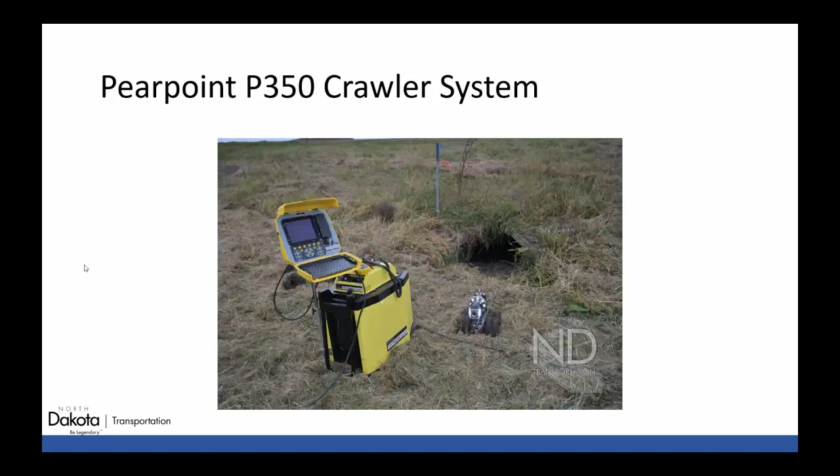To go over some of the crawler's capabilities, this system is completely waterproof. It is submersible up to 300 feet. The camera is pan, tilt, and zoom capable, and it runs off of electricity. We've primarily used a generator for collection, but there are other options with this.

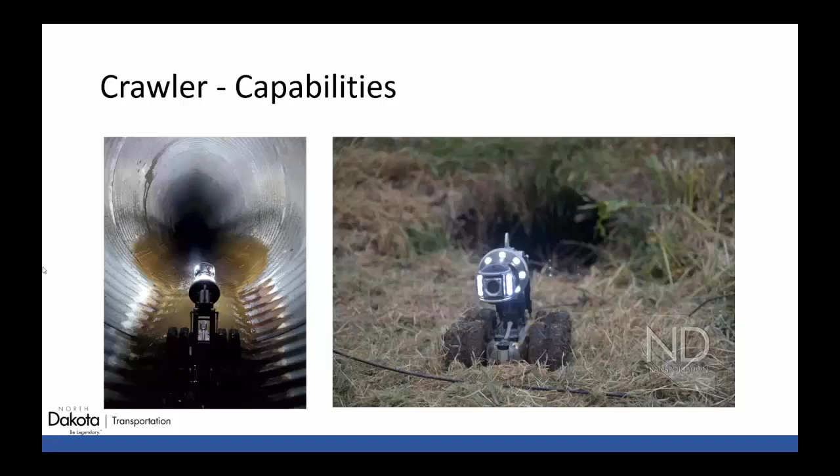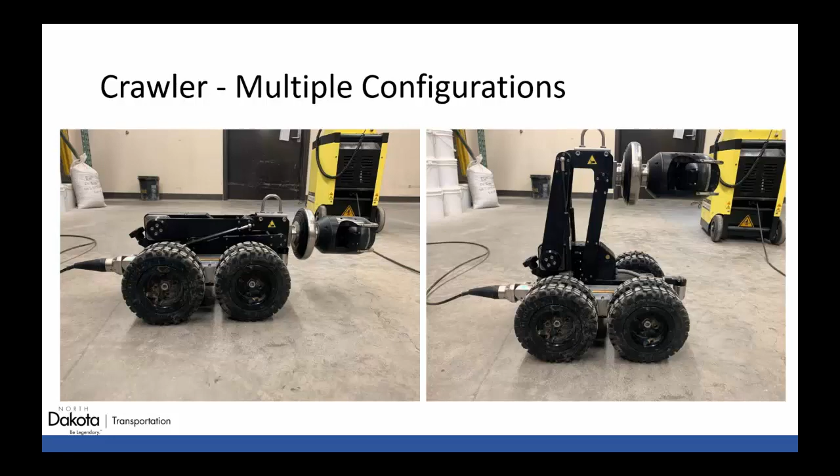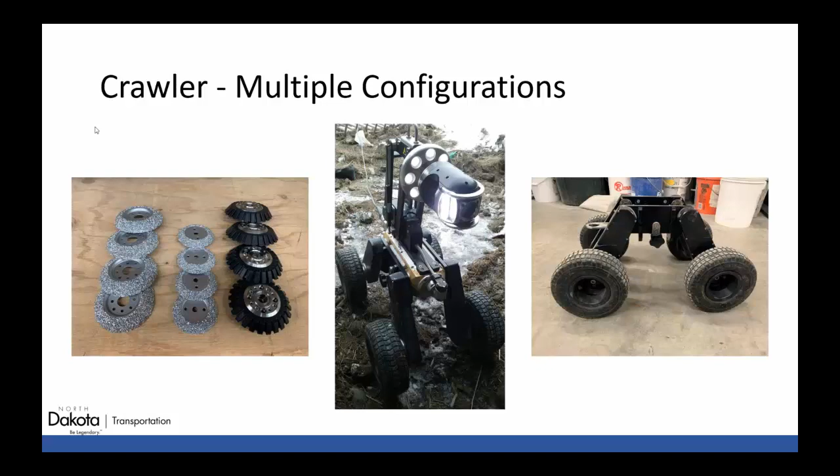To talk about the command module and the powered drum, this crawler is really run by the command module. The powered drum has a total of 1,000 feet of cable in it, and all information travels through this cable from the camera to the command module. So it's really an all-wired system.

The command module is where you control the crawler using the onboard screen to see what the camera sees, and there are also multiple ways to control the camera through this module. As you can see in the picture on the left, John is using the optional pendant to actually control the crawler while looking at the command module to see what the camera sees.

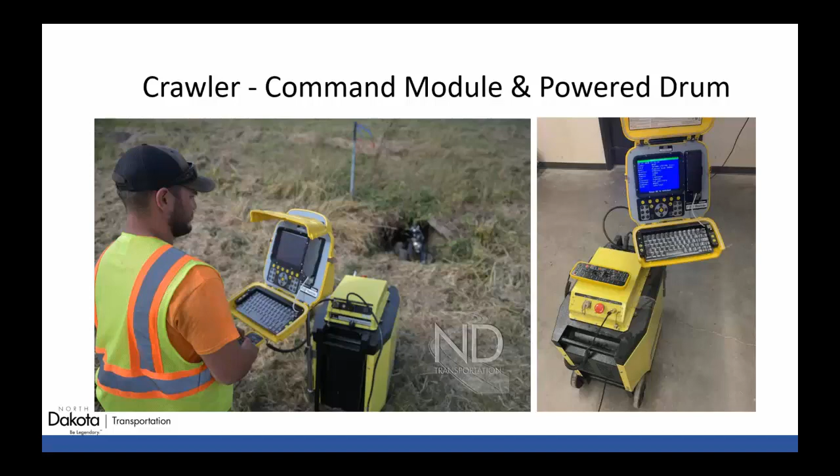So this is what you would see if you were controlling the crawler. Here's some of the on-screen details. On the top is the distance counter, and this is actually done by measuring the length of cable that is out of the powered drum. So distance isn't measured by wheel movement, which is very helpful when the tires spin in mud and slick areas to keep that distance accurate.

Underneath that's the pitch angle, and the camera has a built-in inclinometer, which is used to display this pitch angle. Pearpoint calls the display towards the bottom of the screen the mimic controls, and here's where you can see the relative location of where the camera is, the horizontal orientation of the crawler, and your speed and steering thresholds, whether it's forward, backwards, left, or right.

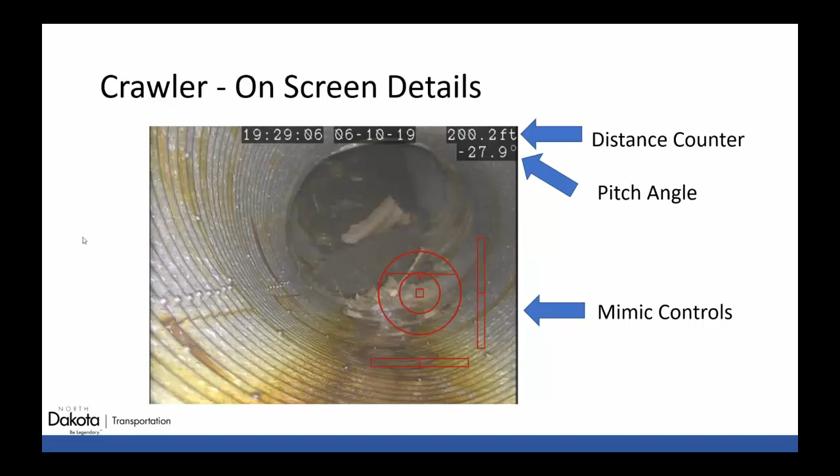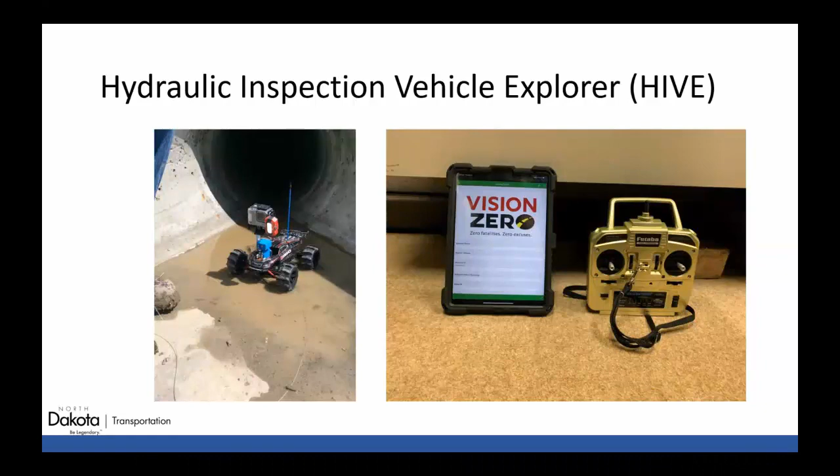Our second piece of inspection equipment is our Hydraulic Inspection Vehicle Explorer, or HIVE for short. This is our more speedy and user-friendly option, consisting of a GoPro mounted to an RC car that can all be controlled using an iPad and a controller.

We first found out about the HIVE unit from MnDOT. On their website, they have building instructions, parts lists, wiring schematics, anything you can need to assist in putting together the units, along with general information and research that's been done on it.

Also, North Dakota LTAP has put together a HIVE, actually before we did. Dale Heglund with NDLTAP let us borrow their unit to assist us in putting together our first HIVE. Dale also gave us all their own parts lists, kept all their receipts and boxes to all the individual pieces, and this helped us out tremendously.

Thank you, Dale. LTAP also has information on their website, including a user manual for their HIVE, if anyone is looking for additional resources.

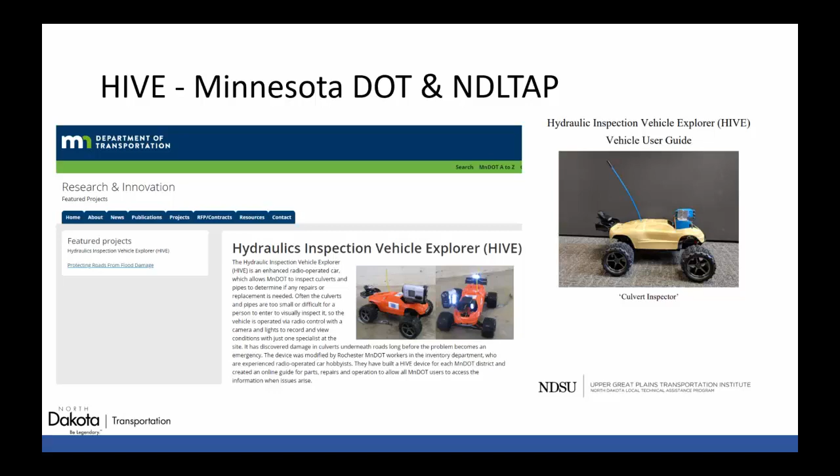We were invited by Mark Schrader with FHWA and Dale Heglund with NDLTAP to come and see how inspections were being conducted on pipes near Max, North Dakota in 2019 that were of importance to FHWA.

This was the first time we really got to see the HIVE in action. We actually used LTAP's HIVE for this inspection, and FHWA was using the Esri Collector app for their documentation, conditioning, and location mapping for the pipes under these roads.

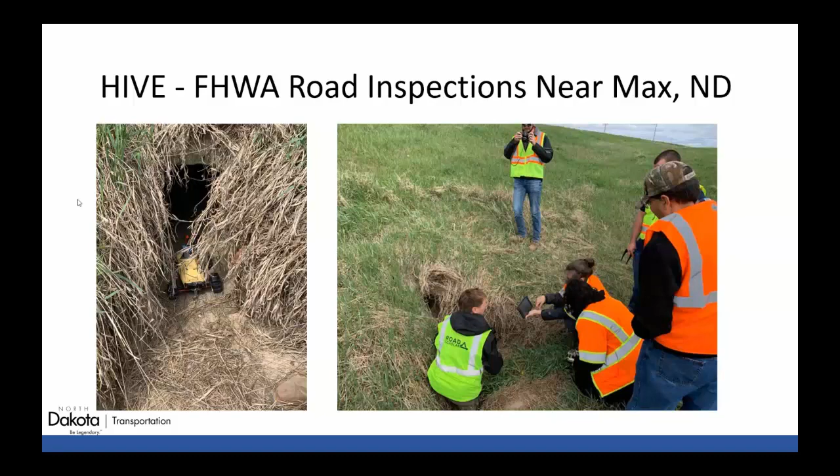So let's go over some of the capabilities of the Hive. We found out this thing is very capable. We've had great success with this unit being able to run in actual really harsh pipe conditions. This thing's waterproof to about 4 inches of water, and we really consider this a little monster when it comes to these inspections. It's a pretty cool piece of equipment.

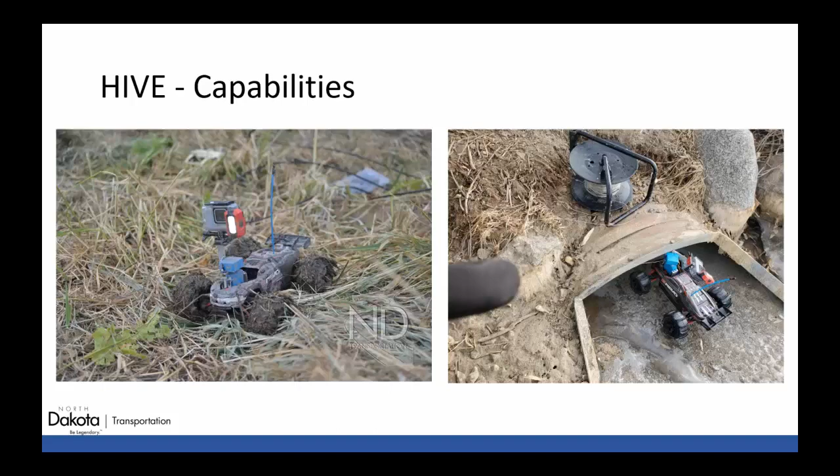We've found the Hive to be much more user-friendly compared to the crawler due to its ease of deployment, weight, and overall speed of collection from one pipe to the next, which is why we'd recommend this for mass pipe inspections.

On the picture on the left, John actually deployed the Hive units into the failure area towards the middle of the pipe. This is much easier to accomplish with the Hive compared to the crawler, due to weight and size. With the use of a GoPro camera on the RC car, the picture quality is really superb and makes it easy to find issues with the pipes that may not be as easy to spot otherwise. The picture on the right, I really like it—it shows the quality of the GoPro camera and what you can see inside these pipes.

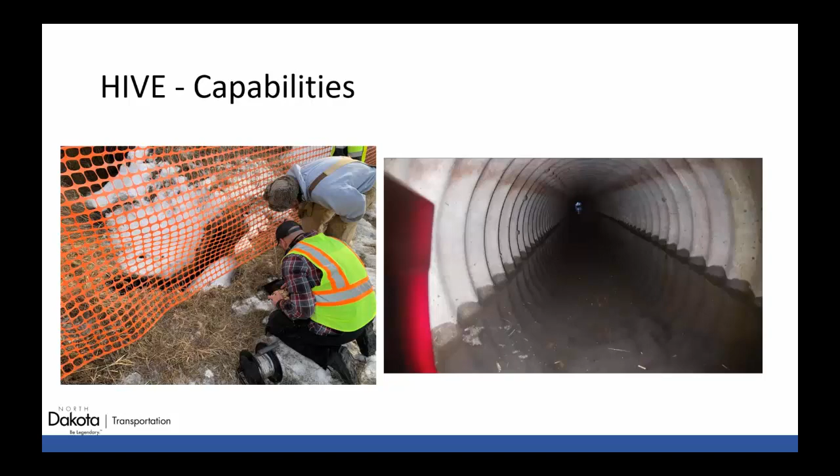Now I'll get into some of the different inspections we've done that are more focused on the crawler. The first is a pipe along the west ditch of I-29, northbound through Grand Forks on exit 141, right next to a railroad bridge. This pipe is about 140 feet long and ran parallel with the interstate.

This pipe was disturbed due to a landslide, and we were asked to go inspect it by our NDDOT geotechnical section.

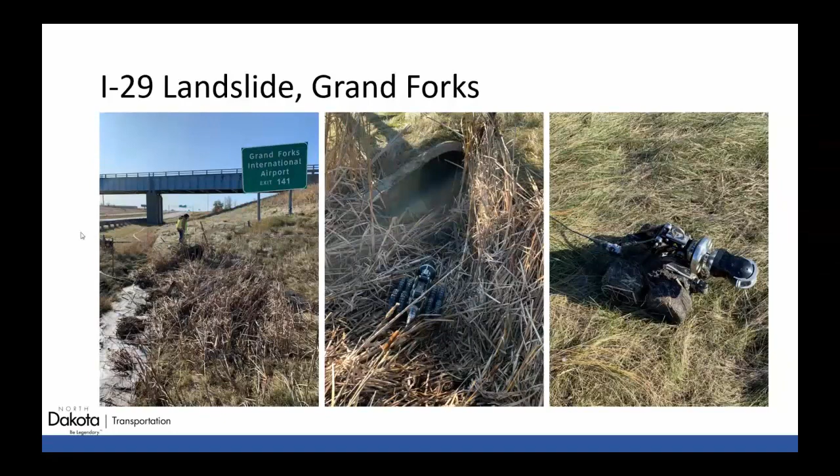As you can see, this landslide really messed up the alignment of this pipe. The embankment near the railroad bridge crossing displaced the end section by about 2 feet. We actually had some serious issues with our equipment traversing this pipe due to the severe separation between the barrels, as you can see.

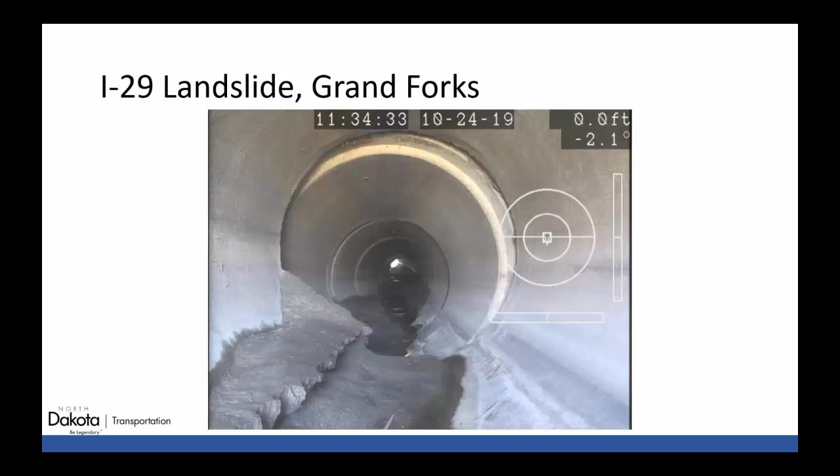Another location we inspected pipes due to landslide was around Horseshoe Bend. Horseshoe Bend is located near RP 128 on US 85, just north of Long X Bridge and south of Watford City. We inspected 2 pipes requested by our geotech section.

One pipe was over 300 feet long and the other was over 500 feet long. As you can see from the picture on the right, one of these pipes actually became visible from the surface due to the landslide.

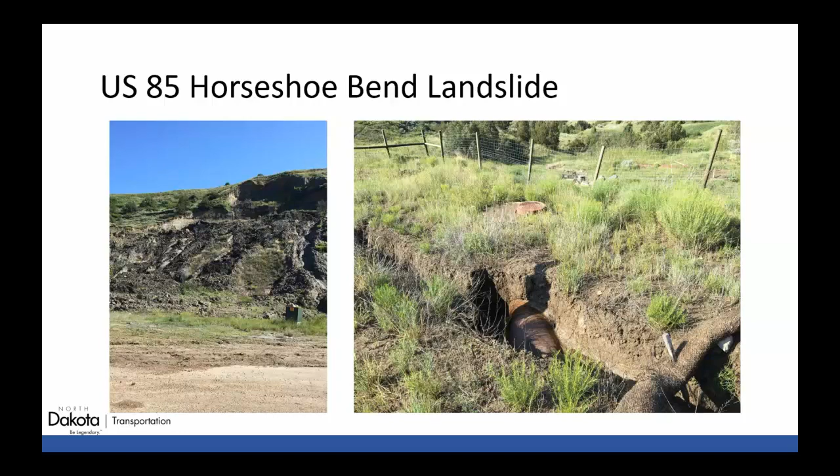So we deployed from the inlets of each pipe and really tried to find the best way to set up and maneuver through the landslide material, which was very slippery Badlands clay, as you can see from some of the material in these pictures around the pipe inlets and where we set up.

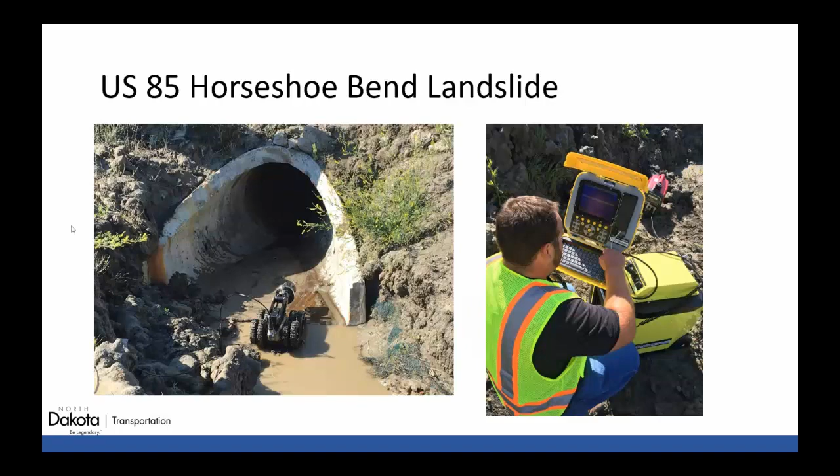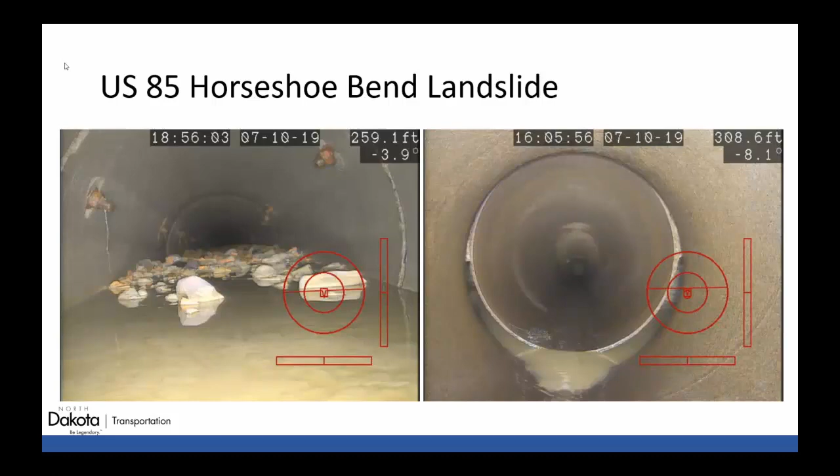Our next inspection happened in Bismarck near Grant Marsh Bridge. The inlet of this pipe was located in the south ditch of I-94. It traveled downhill at a 2-to-1 slope to River Road, where it then flattened out under River Road and exited directly into the Missouri River.

We were asked by Bismarck District to inspect this, as they knew there was already an issue in this pipe, since the ground close to River Road had started to wash away around the pipe. They just wanted to see how bad the issue was and how much of the pipe actually needed to be replaced or fixed.

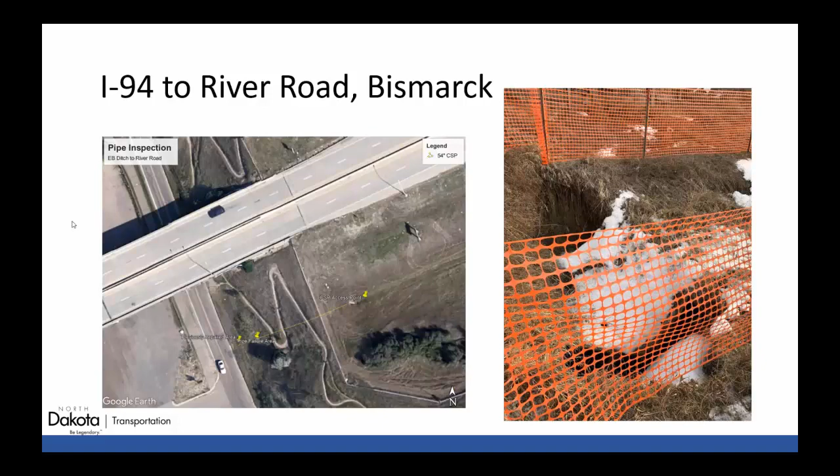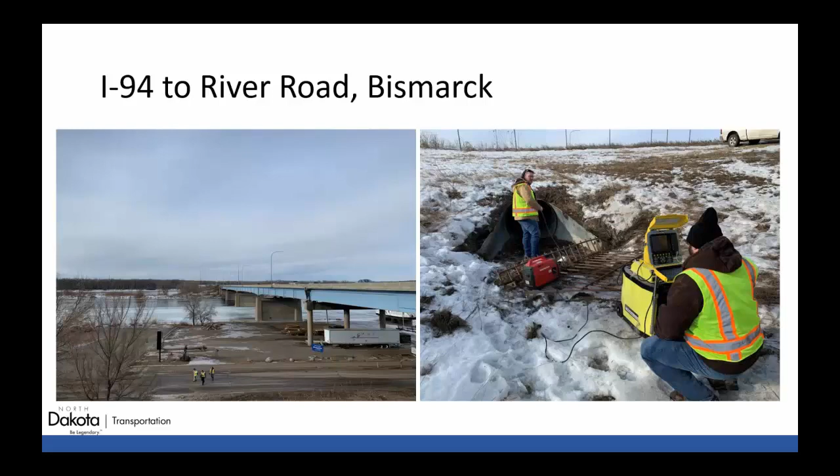So we deployed in the south ditch of I-94 at the inlet of the pipe. The outlet at the time was pretty well submerged by water and also partially frozen, which restricted us. The district came out and removed the large inlet grate in order for us to actually conduct our inspection.

When we deployed, we hit the 2-to-1 slope with ease with our pipe crawler and traversed down the pipe until we hit an issue we really hadn't seen before. Close to where the 2-to-1 ended and the pipe flattened out, we hit foam, as you can see from the pictures.

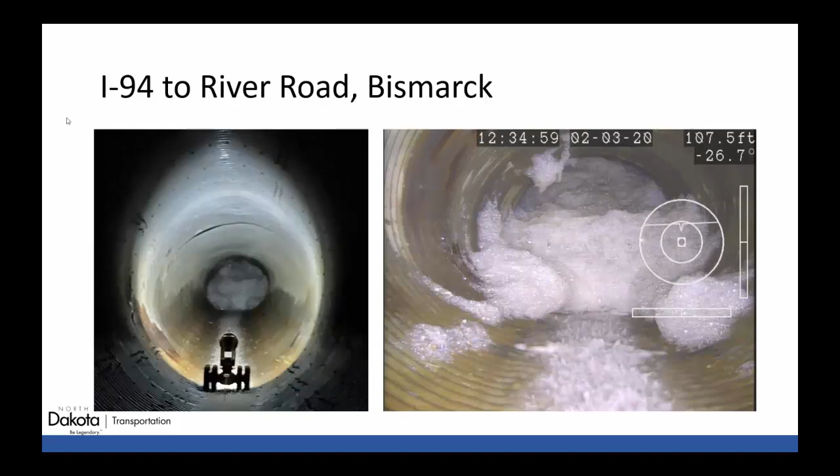We put our crawler through the foam to see if we could see anything and maybe see if it ended. Instead, we found out it did not end and completely engulfed our crawler, including the camera, and didn't allow our camera to see anything. We pulled the crawler out. This is how it looked, just like a little cloud on wheels.

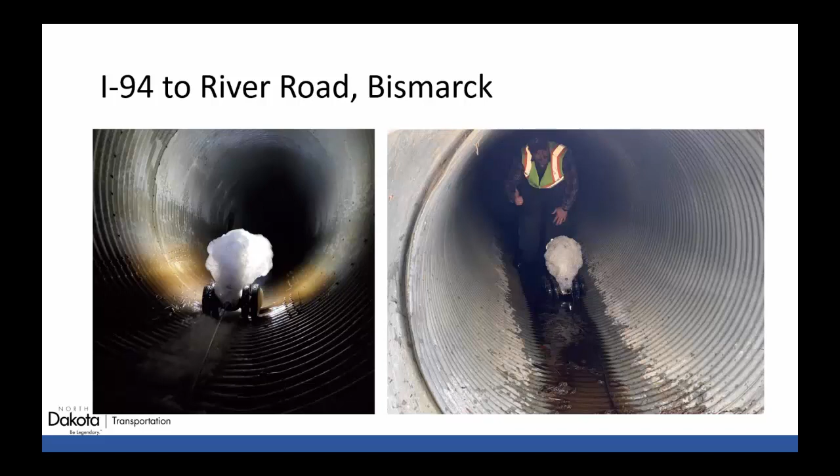So we waited a few days and went back out to inspect this pipe once the foam had subsided. As you can see from the picture, the water traveling down this 2-to-1 right before the pipe flattened out was actually exiting through a hole in the invert of this pipe, flowing around the pipe, causing the washout issue that the district saw. Here I will show a short video of what this actually looked like from the crawler.

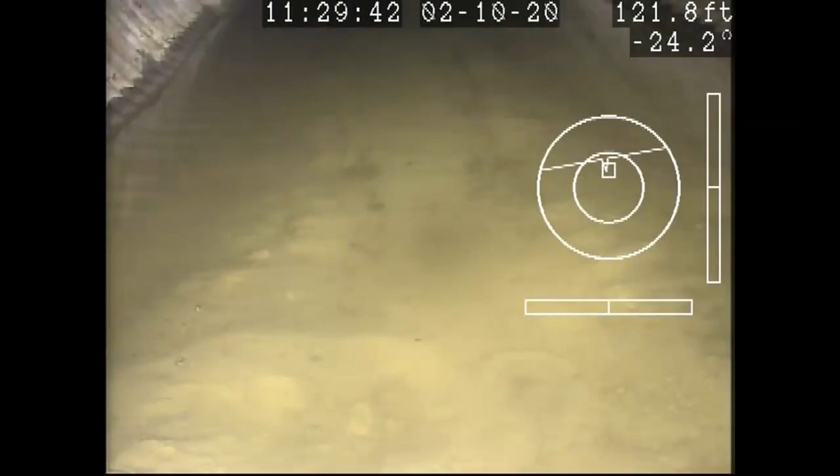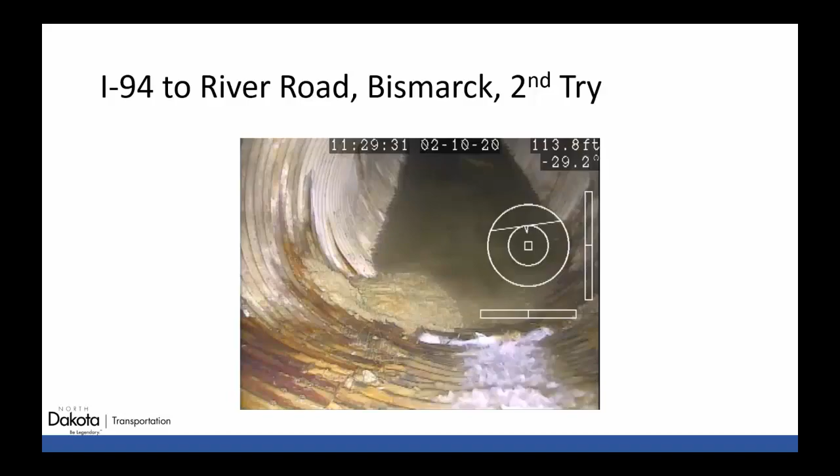So now I'll turn it over to John and let him go over the Hive unit more in depth, as well as the collection software and where all these inspections and inventorying will lead to.

So a little bit more background on these inspections. The inspections that Aaron was talking about are more of an emergency pipe inspection where typically your failures have already occurred, whether it was from a natural event such as a landslide or a storm event, or just a failure from age or deterioration. Our goal is to assess the extent of the damage and provide an in-depth look and aid the designers in figuring out the best course of repair in these situations.

So these are typically the most extreme environments we encounter. We usually bring both units, and sometimes we deploy the more robust Pearpoint if the situation calls for it. Sometimes, like Aaron said, we use the smaller unit depending on the situation.

On the other hand, these corridor assessments are typically more of an asset management type routine inspection. These are meant to assess the in-place pipes for replacement on upcoming projects, or simply establish a baseline rating to use for deterioration monitoring and planning purposes for the future.

So for these assessments, typically we've been doing 10 to 20 mile stretches, and what we found so far, most of them are functional pipes in fair condition. So these assessments are a great tool for finding pipes that we need to replace, but not only that, they're great for finding which pipes we don't need to replace.

So to do these assessments, we asked for some district input on upcoming projects or problem stretches of roadway to where we could test our equipment and involve district personnel for training opportunities. The first training we did with the Hive unit itself was in Dickinson District down near Mott on Highway 8 for an upcoming minor rehab. We spent a few days down there with the construction staff doing training on this Hive unit.

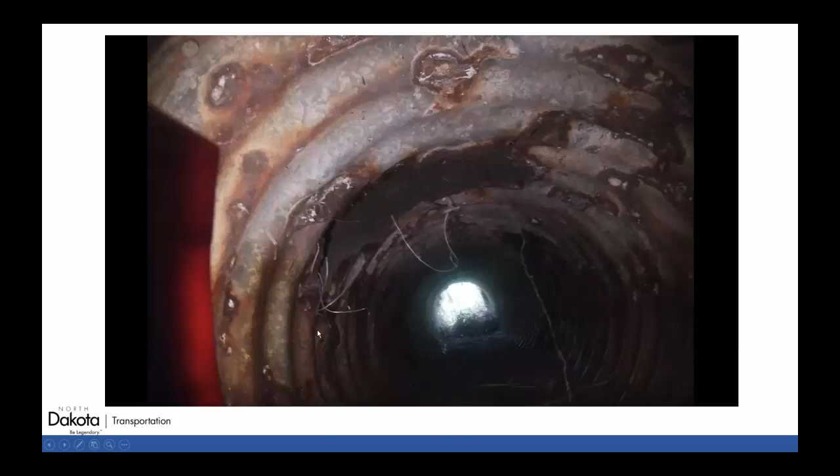So here's a few of those things that we found on Highway 8. Here you can see there's a pretty significant rust hole from corrosive soil in a corrugated metal steel pipe. This is a good example of a construction installation problem. This is probably from unloading the pipe or from actually installing the pipe. You can see a tear.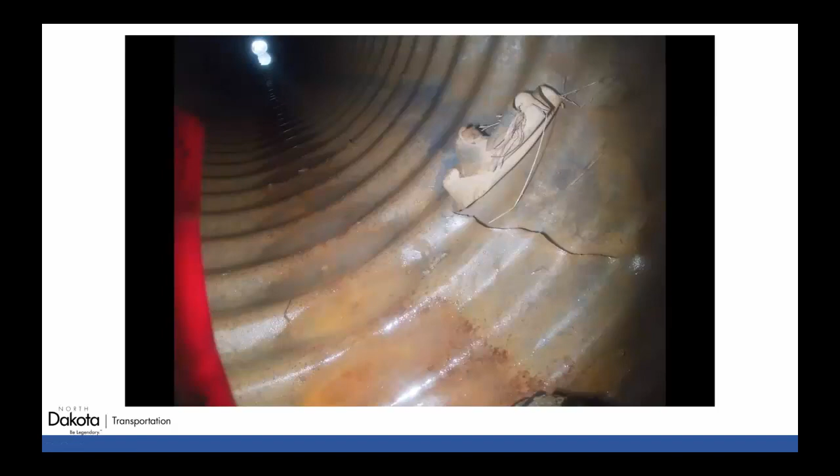Another neat thing to note was actually a few weeks after we did our initial training with Dickinson District, they actually utilized the Hive on a full depth reclamation job up near Halliday, North Dakota on Highway 8. So this was encouraging to us just to see the adoption of the new technology so soon after the initial training. In this pipe, you can see some separation of the barrels here, some standing water, slight misalignment. You can see a little bit of cracking here at about 4 o'clock on the haunches.

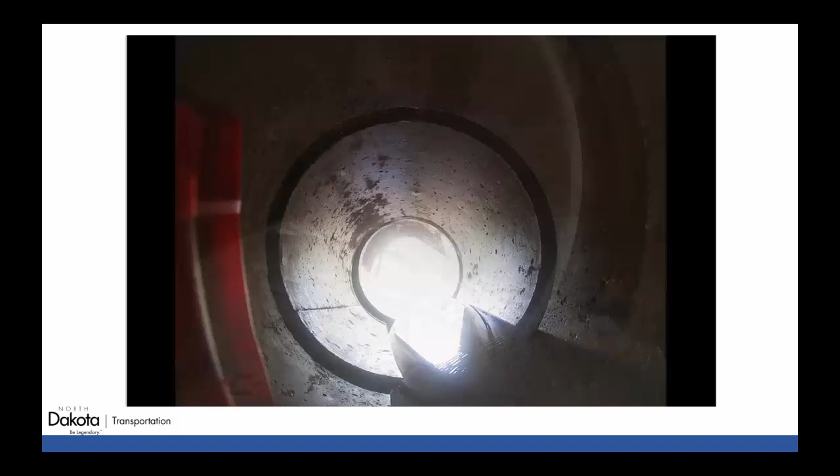This is another pipe up near Halliday. You can see the end section has separated and caused some void, infiltrating soil into the pipe itself. You can see some pretty severe misalignment here. This is a pretty common area where they have some shifting of pipes and some landslides on this stretch.

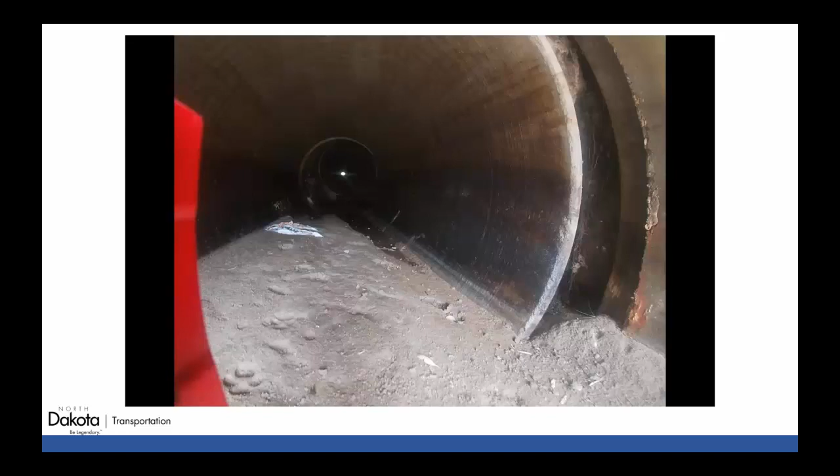This one actually was a few months later. We spent a few days and nights down in Valley City District, near Ashley on Highway 11. As many of you know, they had a very wet spring, summer, and fall when we were down there back in 2019. This made some interesting environments for us to run our equipment through, and it let us test our equipment in some less than ideal situations.

So here you can see this is the end section. You have some pretty significant cracking at the crown. You also have some spalling at the joint. The barrel on this one actually looked pretty good, so this would be a good candidate for just an end section replacement.

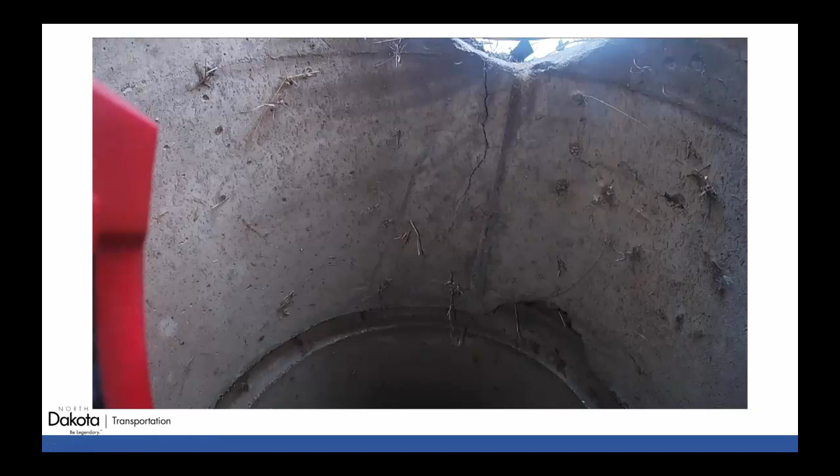On this one, there's a lot of wetlands down in that area of the state, so there's a lot of equalizer pipes, and with high flows comes high sediment. The water recedes and leaves a bunch of sediment, so here they had about a 50% full pipe of sedimentation. The barrel actually looked pretty good, but this would be a good candidate to mark for cleaning.

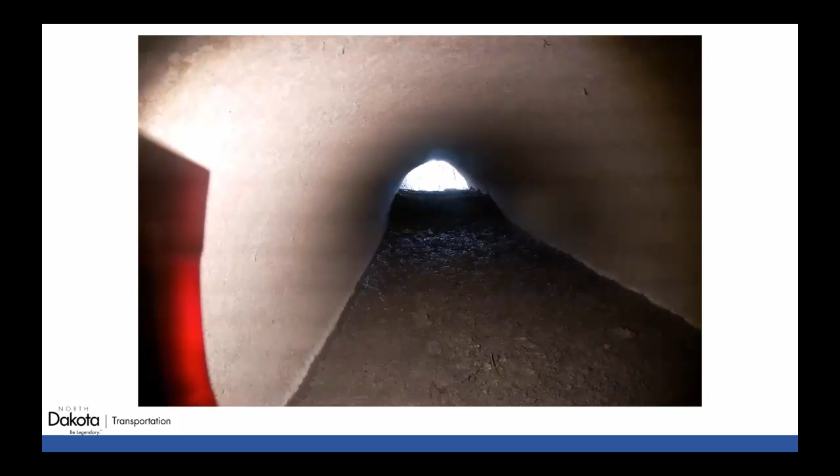So this is the typical kind of pipe environment you'll see in some of these areas. Being as they aren't tied pipes, you have a little bit of shifting. You can see at each one of these joints you have infiltration of soil, and also pretty muddy conditions.

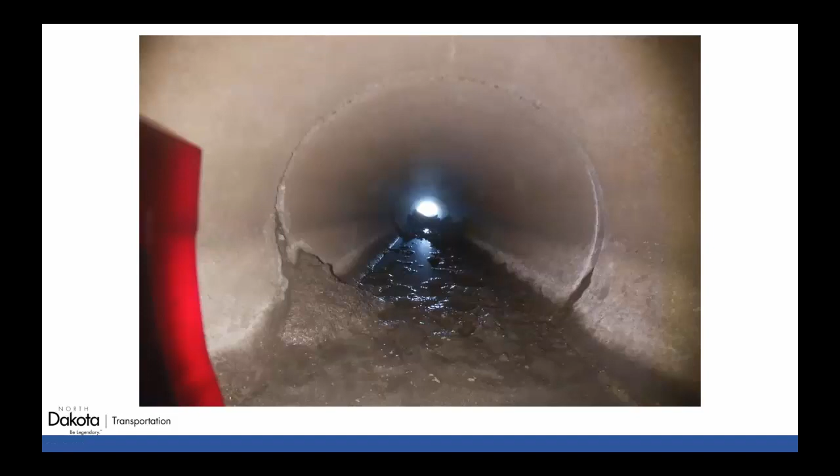The problem with pipes like this, when you get these separations, is you have all of this soil coming in and creating a void up top of the pipe. Then you lose your soil support for your flexible pavement up top, and it can't span it. Pretty soon it fails and you have a giant pothole in the road.

Valley City has experienced some of these issues on this stretch of roadway, and they were actually pretty hopeful and excited about going and investigating some of the other issues they've had with other pipes when we left this equipment with them.

This is also the first project where we introduced the Survey 123 data collection app. We received some great feedback from the Valley City maintenance staff about the ease of collection and the pros of using digital storage. We collected about 70 pipes here, and you're looking at 5 to 10 photos and a video for each one, so you're talking quite a bit of media. This really helps to keep things straight and collected efficiently.

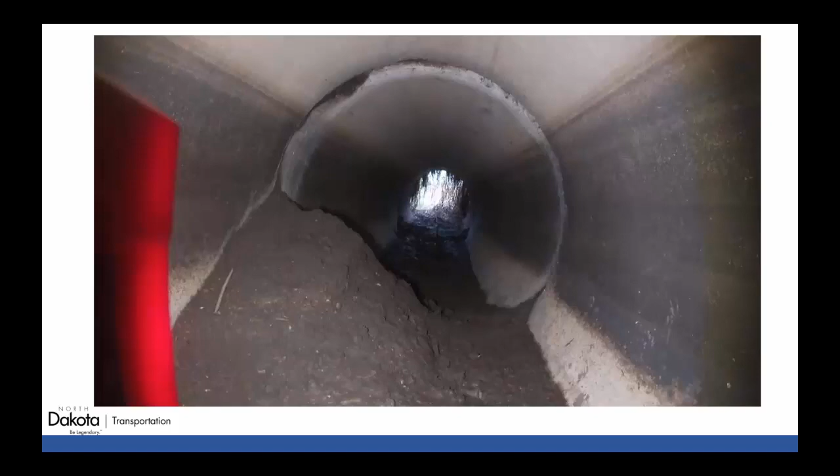So this is a few months later, back in November. We were called out - our geotechnical engineers wanted us to go take a look at a few problem pipes in the Bismarck district down near Selfridge. So we went and took a look at those.

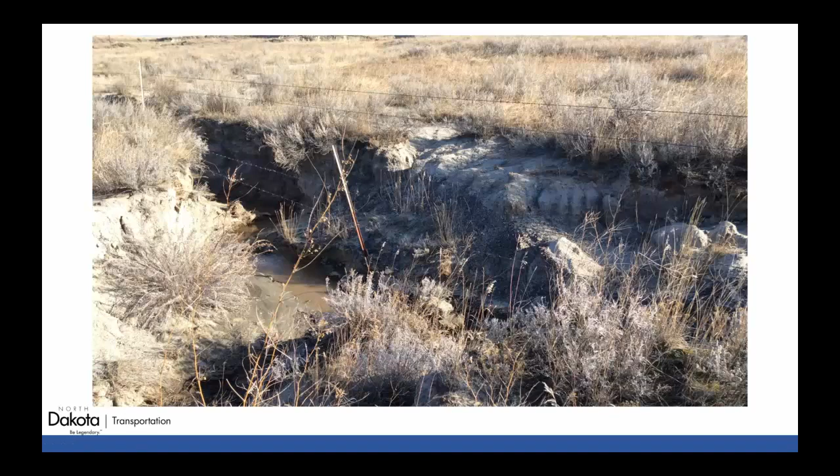Here you can see some pretty significant washout and some scour damage from lack of slope protection. So this is actually what we found, and we're all too familiar with these dips caused by pipe settlements. On the right, this was actually the same pipe, and you have about 45 inches of standing water that wasn't draining through the pipe. We also had a section on the other side where you had some washouts under the asphalt that it was bridging.

So we ended up conveying these results to the Bismarck district back in November, and that prompted them to do a full centerline pipe inventory on this project for an upcoming sliver widening.

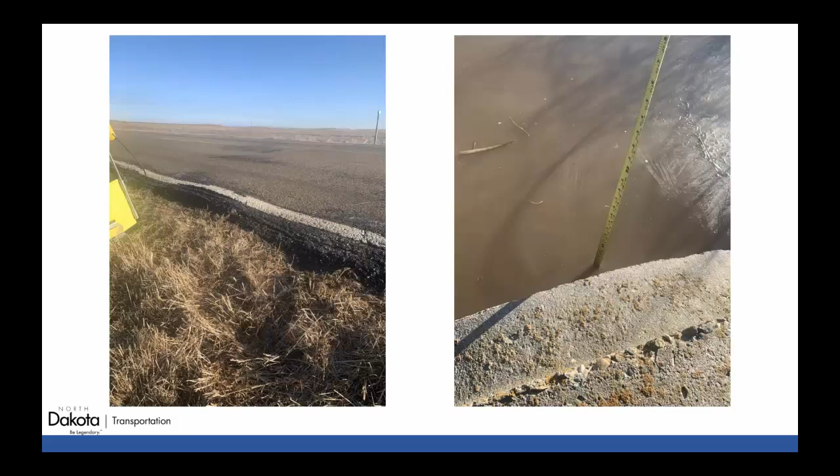So fast forward a few months, this is that same stretch of roadway. We went out and spent a few days with the district staff there, and obviously you can tell it's winter, so that posed some interesting challenges. Anytime you're talking about cold weather and gloves and touchscreens and batteries and electronics, it creates some issues, but overall it went pretty well - it just added a little bit to the collection time.

Obviously digging out pipes when you're talking about a few feet of snow takes a little bit of time, or even finding pipes if they didn't have the markers was next to impossible, even if you knew the location of the pipe.

Also, the reduced traction in the pipe was kind of an unforeseen circumstance. It's difficult to drive an RC car uphill on ice, so you kind of had to deploy from the upstream end. And then once the weather started warming up, all of this water had to evacuate through the pipes, and that put a bit of a delay on us as well.

Some pros of the winter collection, obviously it's downtime, so you have more available staffing. Certain pipes that don't ever drain, you can get into them and take a look at the crown while they're frozen over.

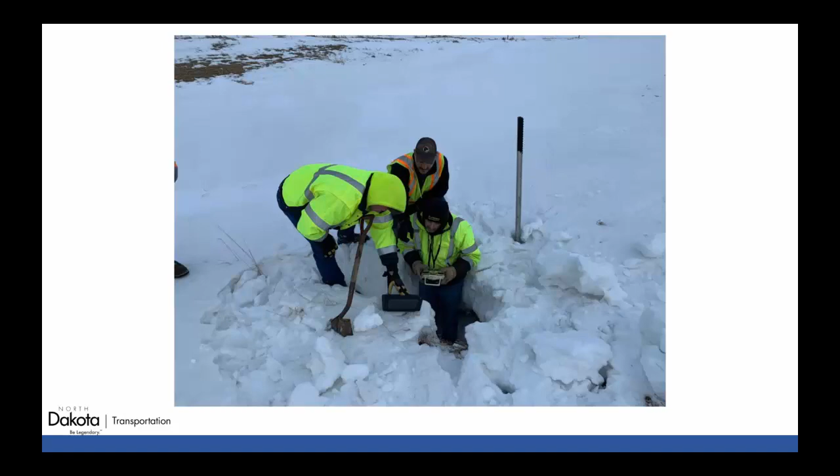So you visited all these pipes, now you have all of these photos and videos. What do you do with all of it? You can't just expect people to sift through tens of thousands or hundreds of thousands of photos to actually find out the information that they want.

So as Aaron said, we demoed the Esri Collector app with FHWA, and we looked at a couple other software packages. Ultimately, we chose Survey 123 because it fit our needs. It's fairly easy for field collection, and it's highly customizable for the form. One of the big pros of this is its offline operation. A lot of these areas you don't actually have cell signal or internet access, so you can collect offline. Once you get back online, it will send all of those forms off and upload them to the server for you.

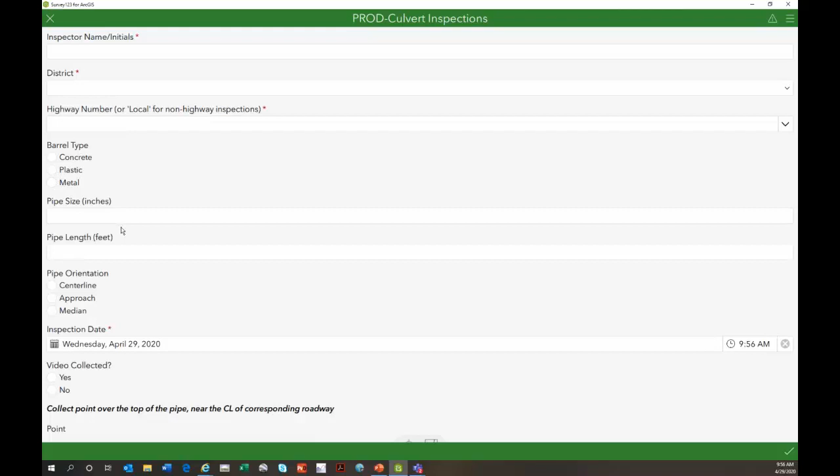So this is actually the Survey 123 data collection app. This is what the inspector would see on their iPad. This is the kind of information that you'll be collecting. Your top is just your general initials, the district at which the pipe is in, highway number. You have a few pipe specific details such as concrete, plastic, size, orientation, all of that. Your inspection date autofills when you open the form itself.

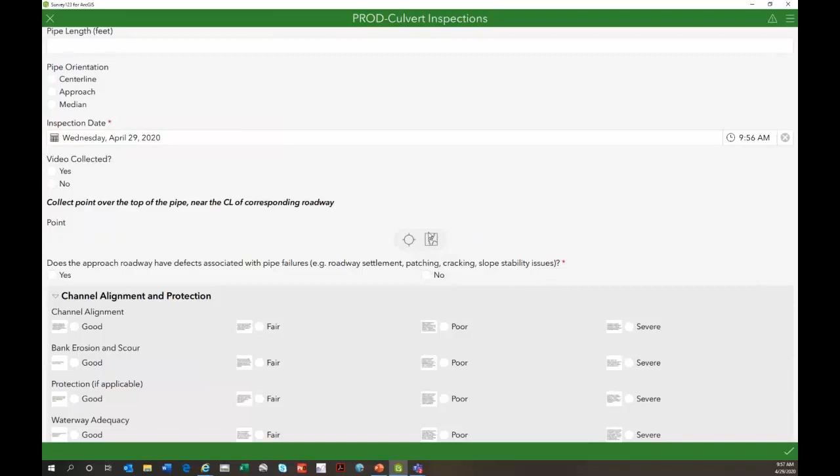The video collected, that's simply to filter if you have media associated with the pipe itself. The collect point is actually a geodata location where if I had GPS capability on my computer itself, it would place me at my location that I'm at. Because I don't, it's telling me I'm there. Now this can be used for actually assigning you to an RP along a route, so that's a pretty powerful tool.

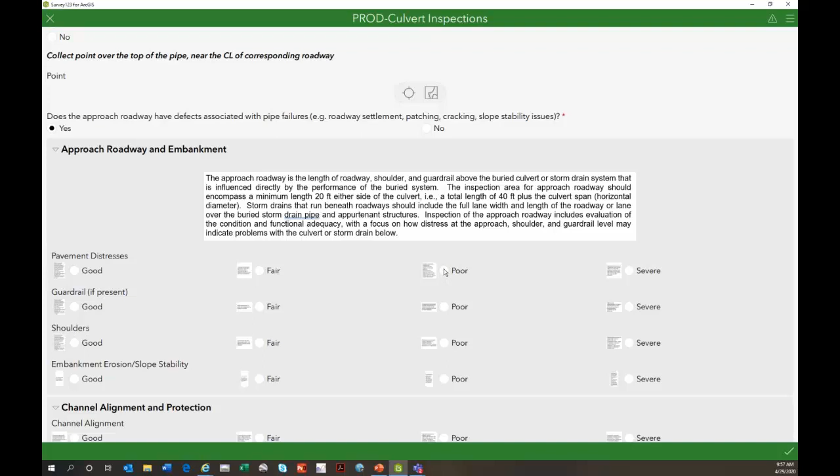Then you get into the ranking system. This is your approach roadway. So like the one on Highway 6 where you have the rutting, you would click yes, and then it'll bring up a series of questions about different distresses along the roadway, and you assign ratings to that. It automatically prompts you to bring up a camera. If the camera wasn't being used by Microsoft Teams, it would automatically bring it up, and then you simply attach a photo to it and it automatically attaches. You can add comments to that photo, all of this stuff.

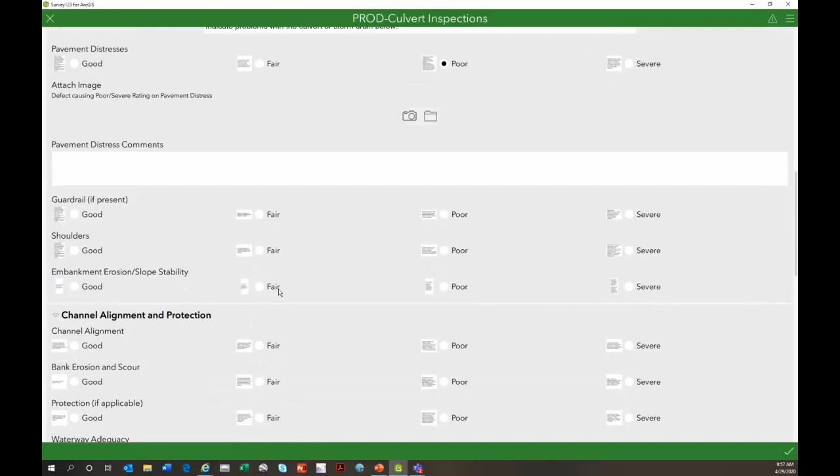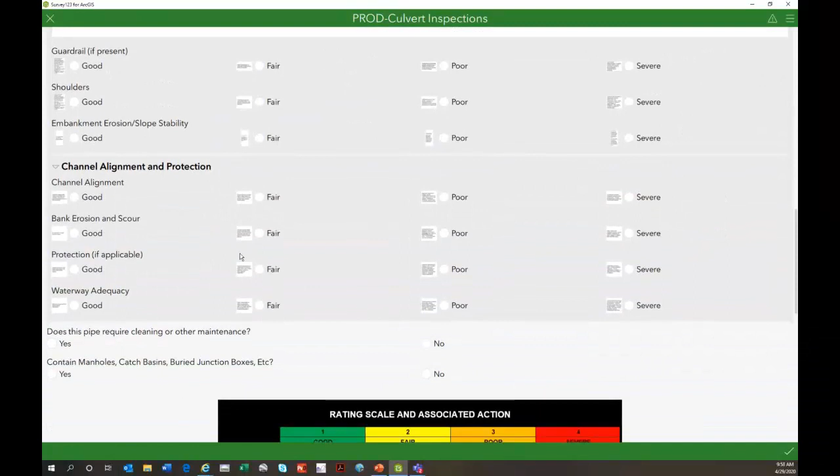It's also worth noting that all of these are conditional statements. So if you click concrete, you'll have different ratings than if you click plastic or steel. And with steel, you have different choices of what type of steel pipe it is. So then you go through all of these conditional ratings. Each one has somewhat of a little cheat sheet to it. These are all rankings derived from the update to the 1986 FHWA culvert inspection manual. I did not just make these up, but they're meant to be a reference guide so that we have a standardized inspection and all of our inspectors are on the same page of what good, fair, poor, severe actually mean for each of these respective ratings.

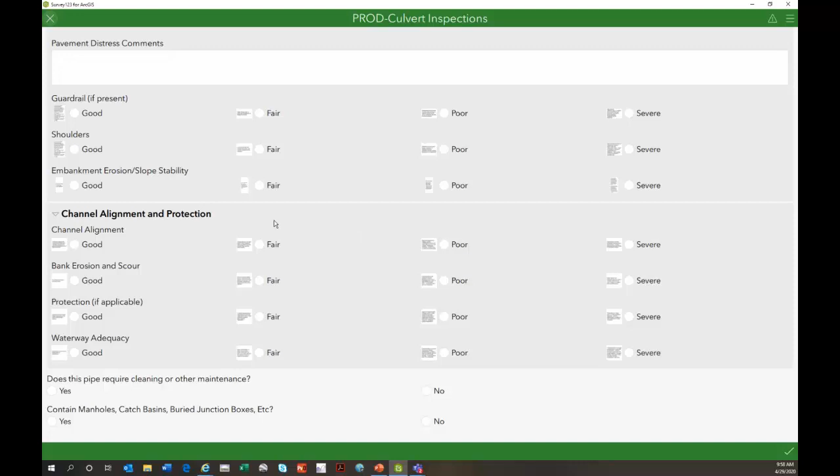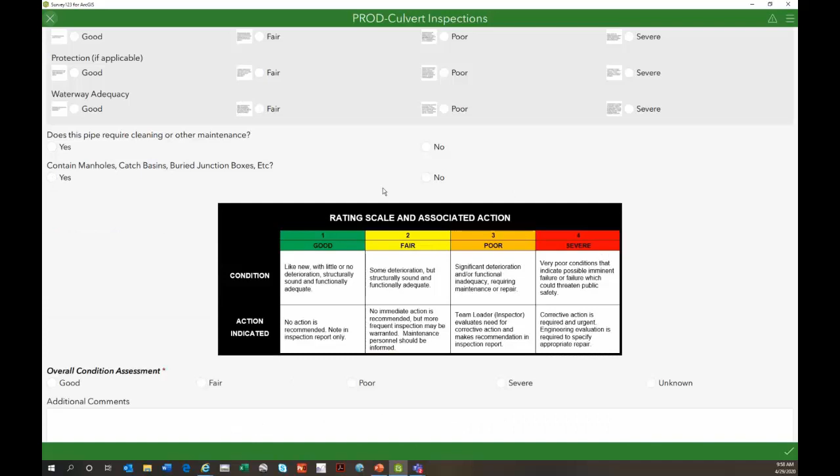So you keep going through all of these. Some of the things at the bottom, like pipe requires maintenance, we'll get into that a little bit later. That's basically a filtering tool so that we can track that. Some of these, basically, if you click yes, they bring up additional fields, but most of the time you're not going to have manholes, catch basins, or junction boxes within your pipes, so it'll keep it collapsed just to keep the form a little bit cleaner.

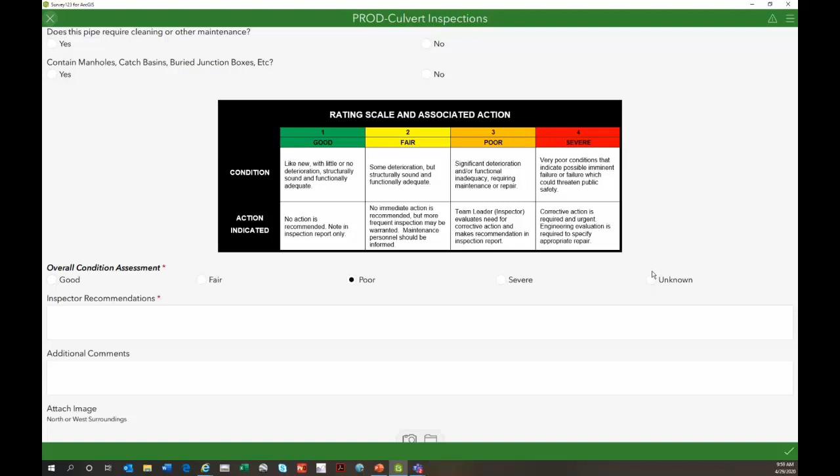Once you're done with the actual inspection itself, you assign an overall condition rating based off of your scale and the ratings above it. Depending on what you pick, sometimes it'll have you do recommendations. If you pick poor or severe, or if you can't find the pipe, let's say it's submerged and you don't know it, you click unknown. That'll also be a filterable thing later. Then you have your associated actions depending on your rating scale. You can enter those, enter your additional comments, and enter photos like I said before. You click the camera icon, it brings your photo up, you take your picture, it automatically attaches. There's no backlogging on that, and it also tags what your photo is, so you're looking at a photo, it'll be tagged north or west surroundings.

It's great for knowing what you're actually looking at. You don't have to type a comment if it's attached in that field. And then you sign, you can put your link to your video here, and then you click submit.

Once you click submit, it uploads to our server. It actually uploads to Esri's server, and then we pull from Esri's server. Esri also has a viewer, but theirs requires a license. So we set up our own viewer so that all of our staff can utilize this without needing an Esri license. This is actually what you'll see.

These are all pipes collected. These are the ones on North Dakota 6 that I was talking about before.

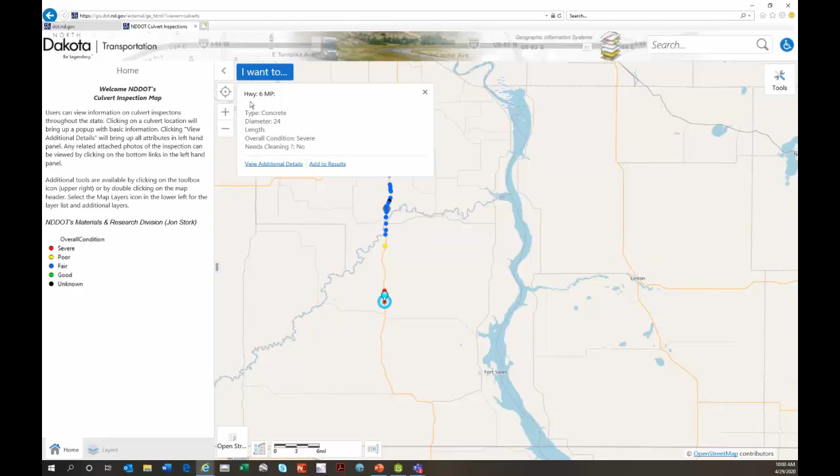So then you can click into the details of it. You see your general details, your overall condition, diameter, length, all of that stuff. You can click your additional details and see all of the defects that were associated on that form. You can see all of your comments, all of your photos are attached at the bottom.

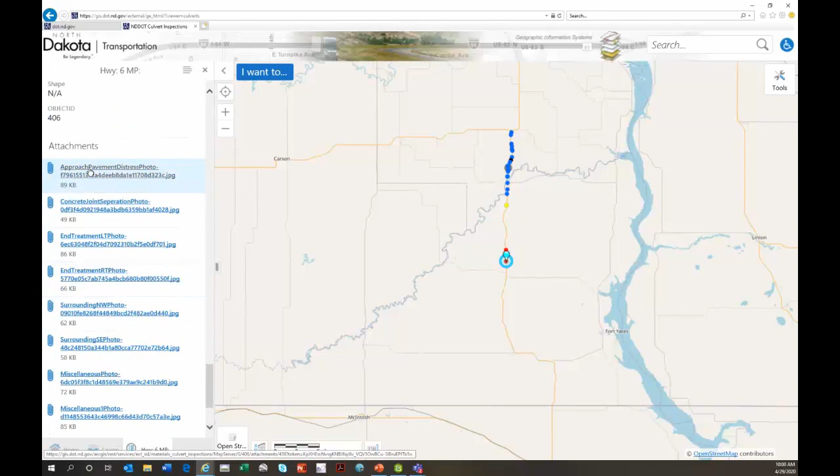So if you want to see, okay, I want to take a look at the approach pavement distress photo, you click that, and it brings up your distresses at that location. It's a really powerful tool for keeping all of your stuff straight and organized.

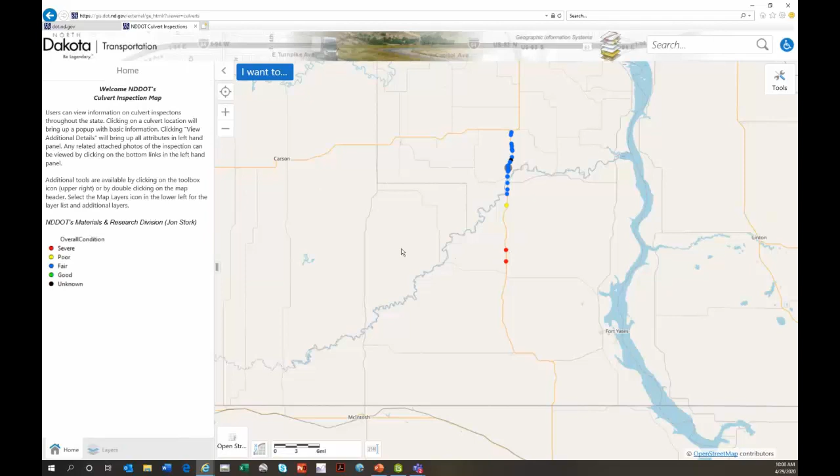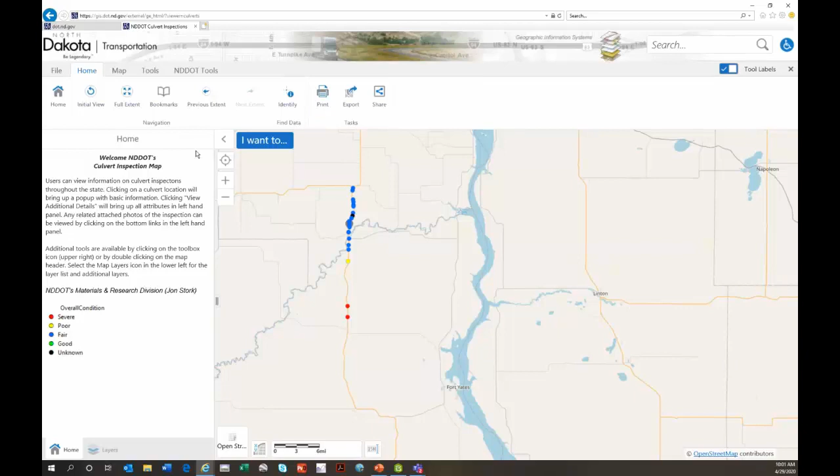Another thing you can do with this is the filtering and query tool. There's basically limitless options of what you can do with this. If you go to tools and go to query, you can sort by different areas, different districts if you made a polygon for it, and then filter by all of these distresses.

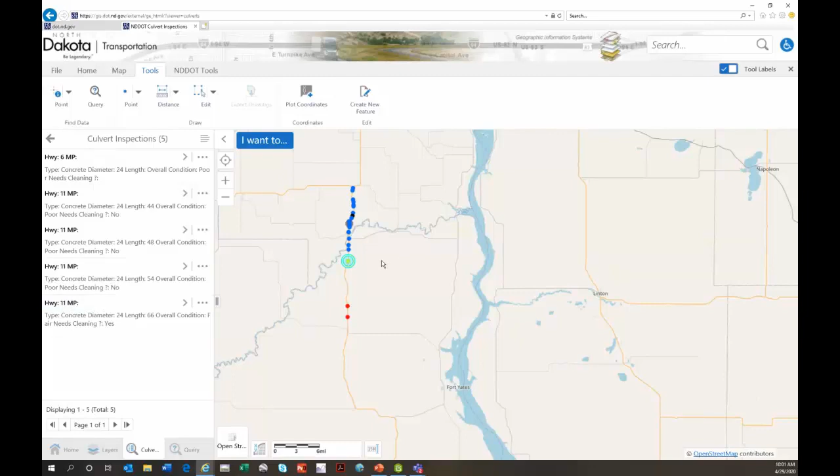So let's say you wanted to see concrete cracking, all of the pipes within the map area that have a poor rating on cracking. You click that, and you have all of these, and then you can export this however you want and do whatever you want in Excel. It's a pretty powerful tool for data observation and utilization.

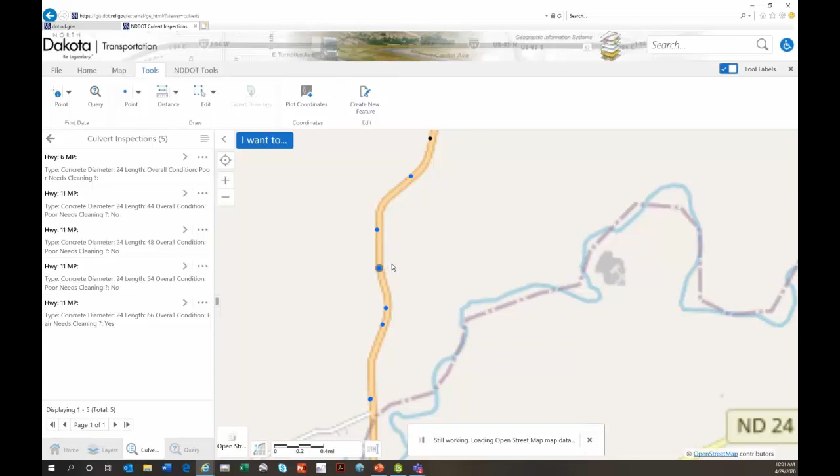So the gray ring around here, this is what we were talking about as the needs cleaning. That's a pretty powerful tool. We'll talk a little bit later, but you could export all of your cleaning locations, and all of their coordinates even, to a report and then hand them off to whoever's doing the work.

So that is our viewer.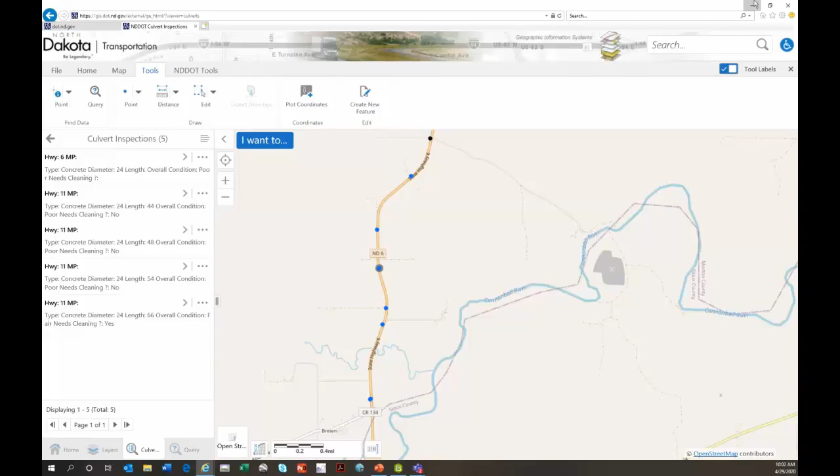So why are we doing all of this? Well, obviously our number one goal here is safety. The goal of this program was to perform these inspections proactively instead of always reactively, to basically get in front of these deteriorations before they become a problem for the traveling public. That's the number one priority. Now, a lot of these go hand in hand.

Your cost savings, obviously, there's a lot of man hours to actually inventory these pipes. But we also save a lot of money in a lot of other ways that are hard to quantify.

Take the River Road example that Aaron was talking about. The pipe was basically a heavy flow 2-to-1 on one side, and then it outletted in the river. So there's basically no way to access it by either end to take a look at what was actually causing that sinkhole.

So within a few hours, the first day, yeah, we couldn't access it. The second day, it took us probably a few hours with the design staff out there to take a look at what was causing that defect, and if nothing else, just to give them a location to start digging. Otherwise, you would have to do an exploratory excavation, shut down River Road, and do some of that stuff. There's a lot more cost and a lot more invasiveness to stuff like that.

You can also take a look at alternative fixes such as liners. You can see, okay, is this pipe still structurally sound? Can we rehab it instead of always replacing it? You can get a nice look inside of the pipe. You have less downtime, less delay to the public, things like that. You can also save money where you can provide justification that the pipe doesn't need to be replaced just by getting an inside look of it instead of just looking from the end sections.

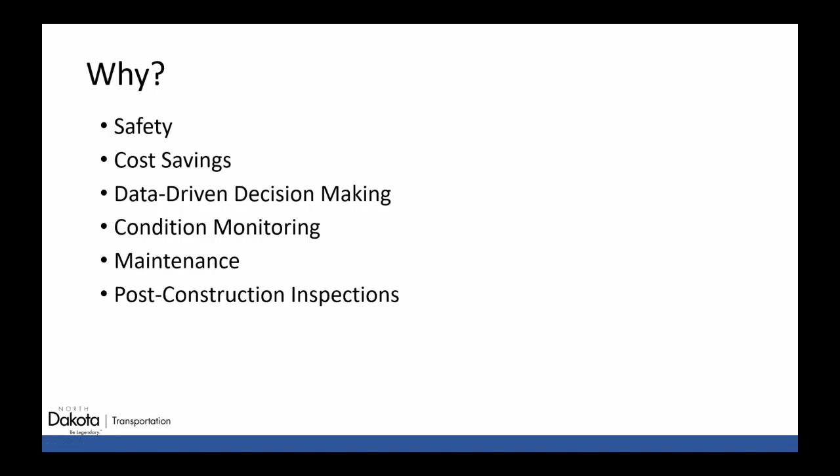Post-construction inspections, that's basically just another QC tool to ensure that we get quality construction, and the ability to monitor during a potential warranty period for defects in installation or the workmanship.

So for any of you district personnel in here, if you would like to get involved with this, or if you have a stretch of road that you think would be a good candidate for this, let myself or Aaron know, and we will try to make that happen.

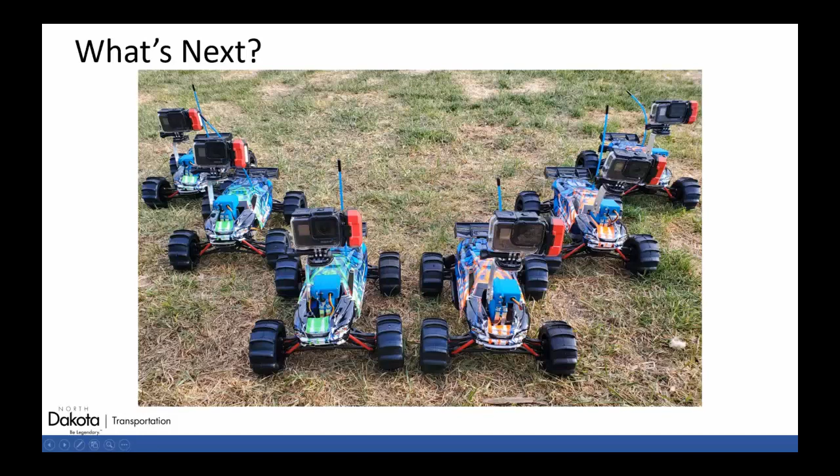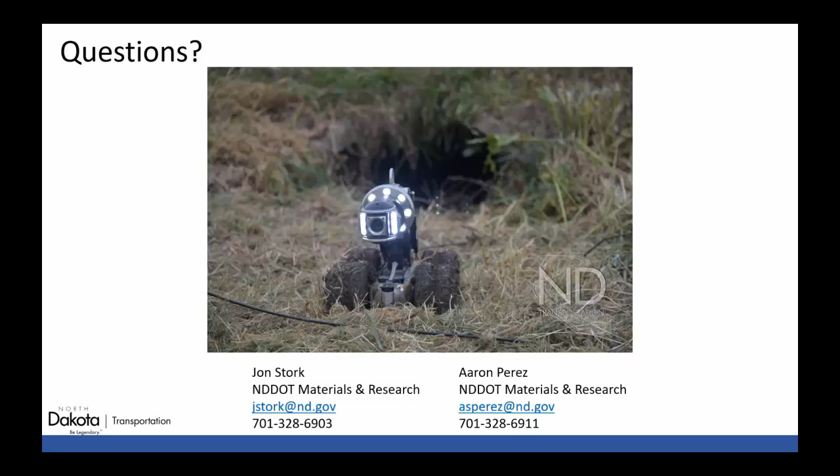So that's all I have for pipe inspections. I think we'll take a question or two. Matt? Yeah, I got several questions that have come in, so send the first couple to you, Jon.

What happens if one of those pipe units gets stuck? Sure, so kind of like Aaron broke down, the big unit is tethered by the data cable itself with 1,000 feet of spool. All of our smaller ones run stainless steel, 250-foot reels, basically. So if your batteries die, if you get it stuck, you flip it, which happens quite frequently. You just reel it back, and you don't lose the equipment. There have been times where we've lost a light or something in there, and a lot of times you can get them out with a little bit of ingenuity, but it depends. If it's a long pipe, that's just how it goes.

The other question with doing the inspections - have you experienced any critters or skunks when you're running the camera through the pipes? Skunks, no, not yet, thankfully. A lot of poop, a lot of skunk poop, and a lot of skunk scent. Especially during the winter ones, you really kind of just jump in there, and it's a nice cozy little hole for them, and it stinks like skunk. You're very hesitant to jump in there. But no, we found obviously a lot of mice, a lot of frogs, a lot of stuff like that, but not yet. I'm sure we will.